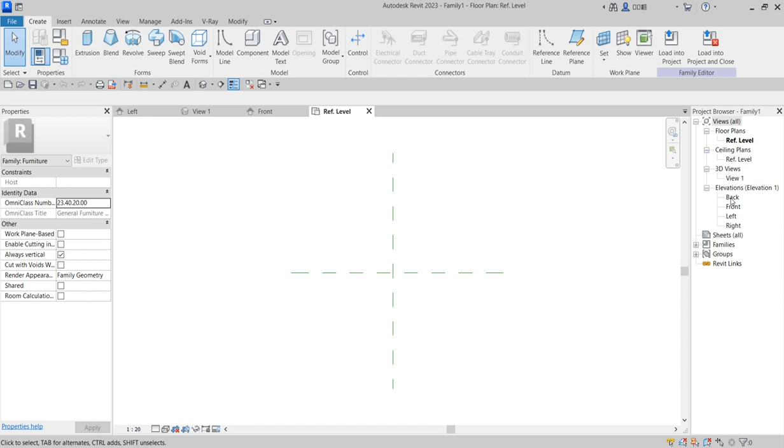So go to elevation, let's go to front or back, choose any one. From these references, what you create is extrusion. Click on extrusion, click on rectangular tools, or first click on vertical so that you have the center to coordinate.

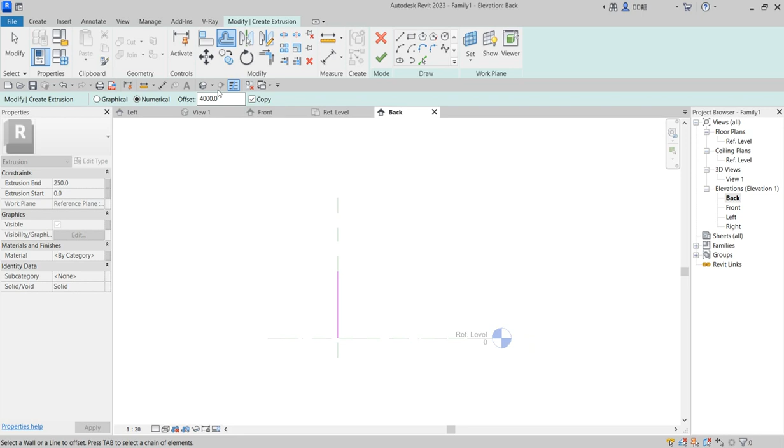So from here now you offset. We want to use 800 millimeter by 800 millimeter. Type 800 on your keyboard, select this, type 800. Do the same thing here as well.

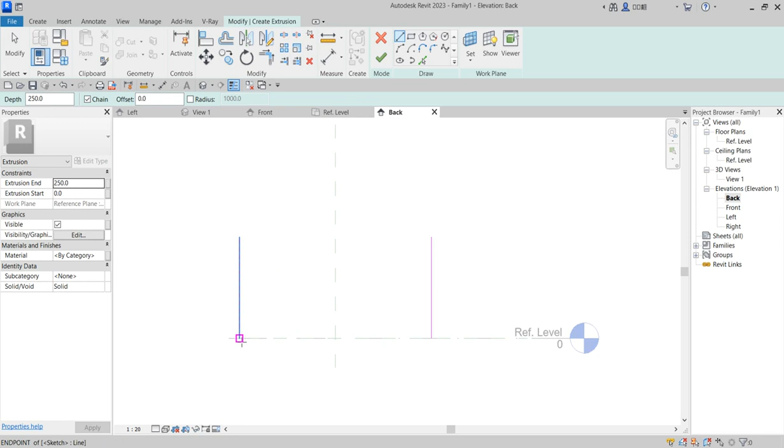Now delete the middle line, delete. So draw the horizontal line.

Offset the horizontal line, make it 400 because we don't want the height to be too high. Now trim.

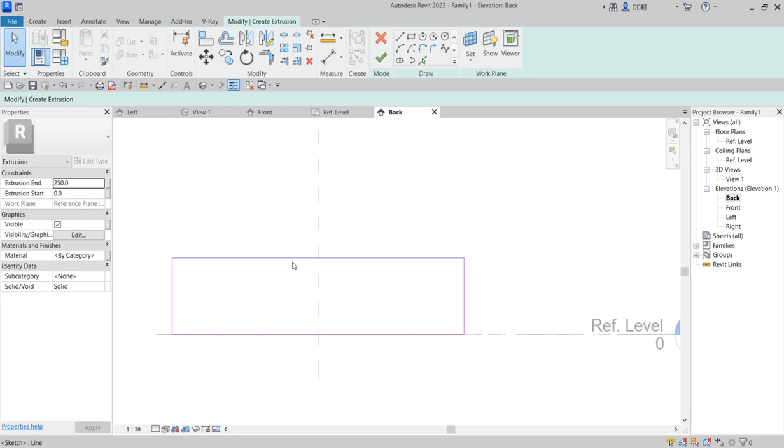Please kindly subscribe. Now choose the rectangle and offset it to -15, because that is the size of MDF board, and MDF board is what they use for furniture. So this is what to do for now.

Say okay, click OK. Now go to 3D view and see what you've done. Click on home. Yeah, that is it. Now this is extrusion, you can expand it more the way you want it to be. You just type the depth here, say 350, enter.

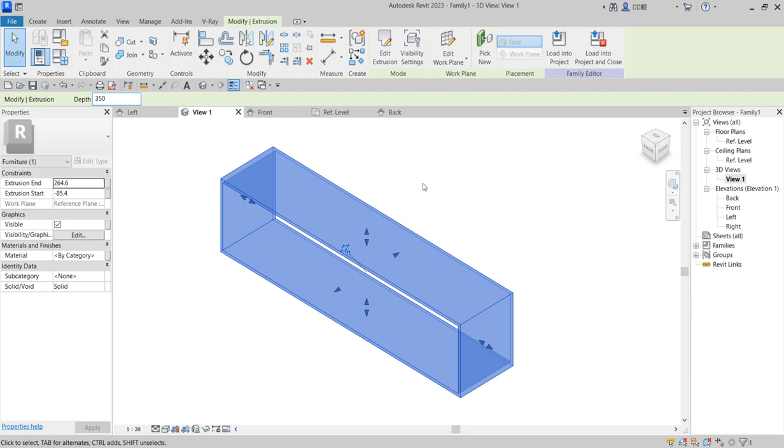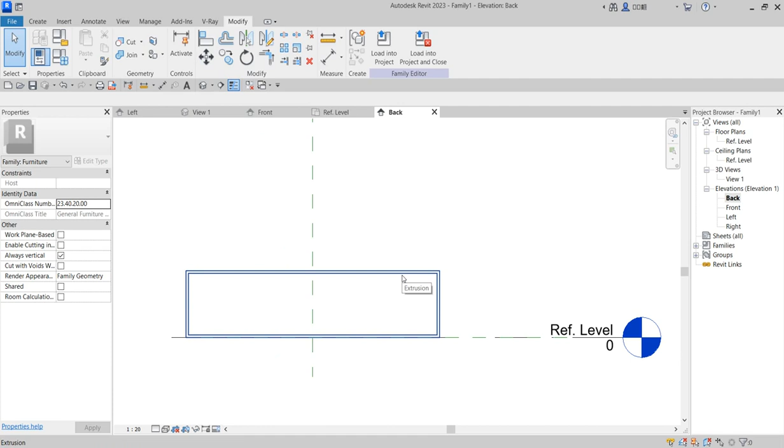So now as we've done this, we want to create the storage inside it. Everything is just about graphics representation. What you need to do in the storage again is create another board, but this time you can decide to copy this one and edit it. Place a copy from here and put it here.

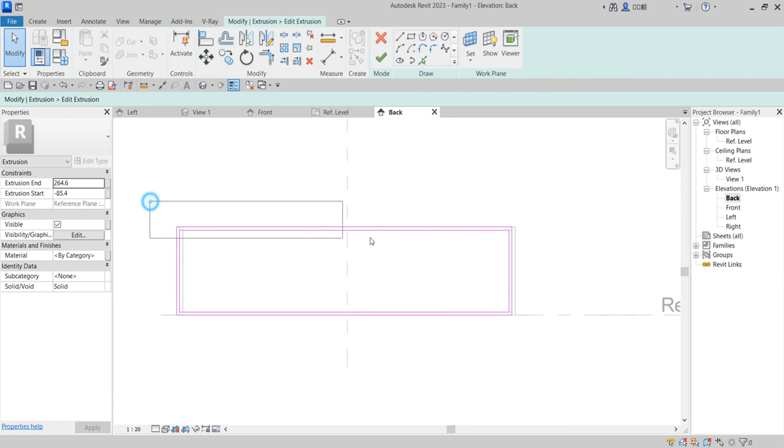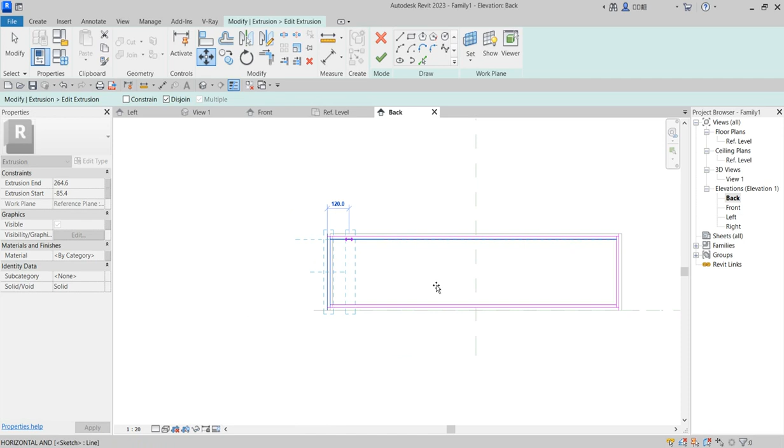Cancel and say edit. In your edit, what you just need to do is bring that here, move. Good, the same thing here, you say move from the outside. Move it to the middle point.

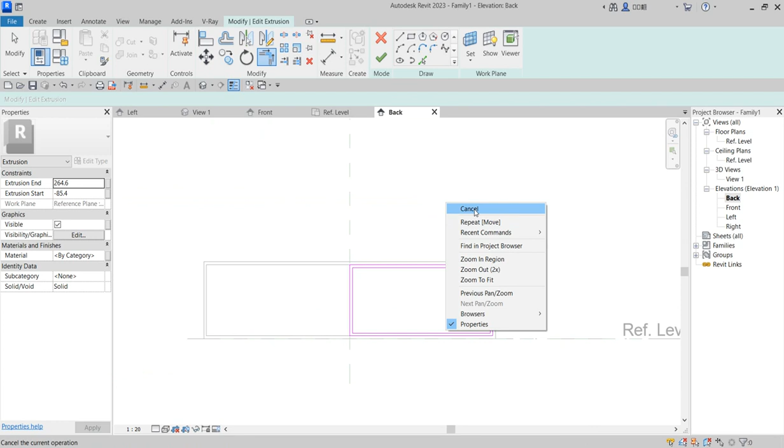Now trim everything. Cancel, trim, trim. So you say finish. Okay, so that's it, you've done that.

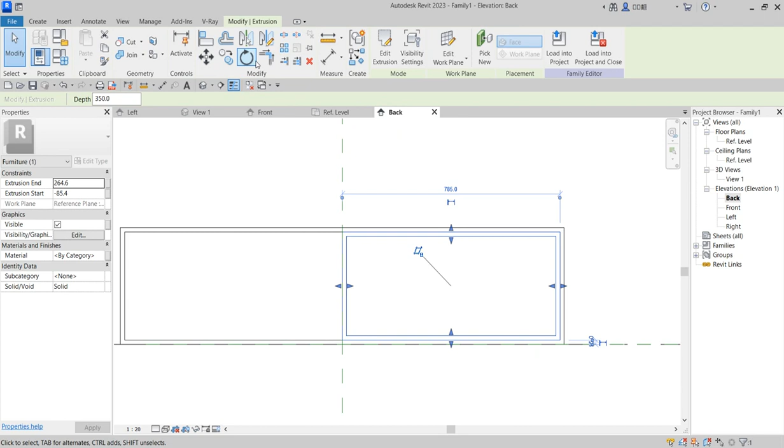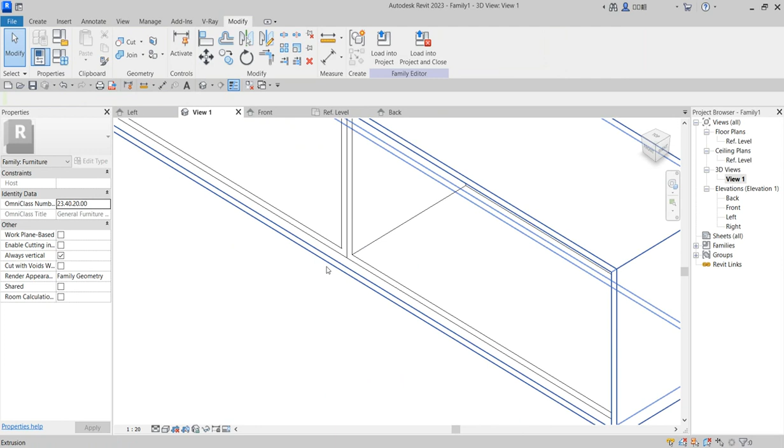So now the next thing to do is click finished. After you have done that, mirror this particular one that you have just created. Go to 3D, then adjust them, move them in a little bit. All right, so after you've done this, go back to the back.

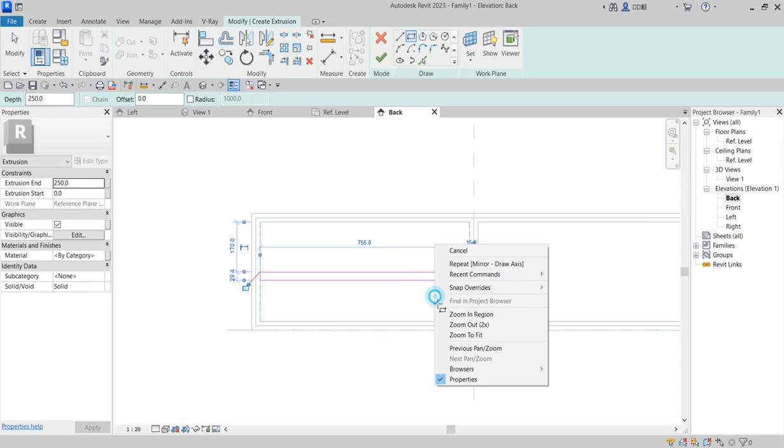So the next thing to do is create another extrusion. We are using extrusion all through here. To create extrusion again from the middle, just draw that box rectangle. Here you select, make it 15 again, press enter. So finish that.

As you've done that, go to 3D. You can't do without 3D, you must always come there and select and adjust. So take it back from there, back, the mirror. Good. So as you've done that, what next to do is create the cover part.

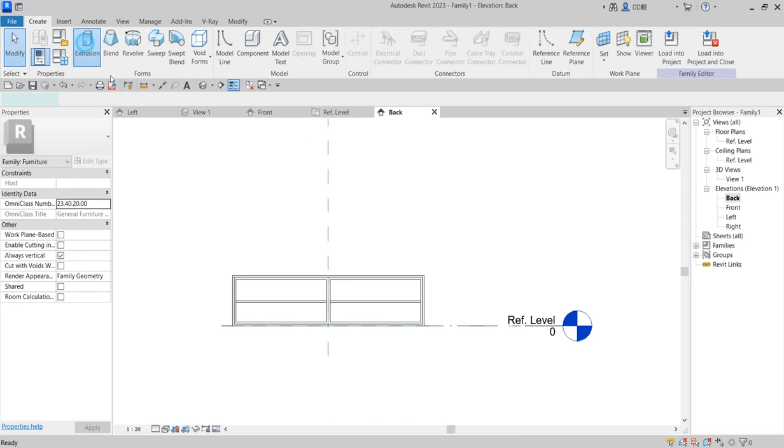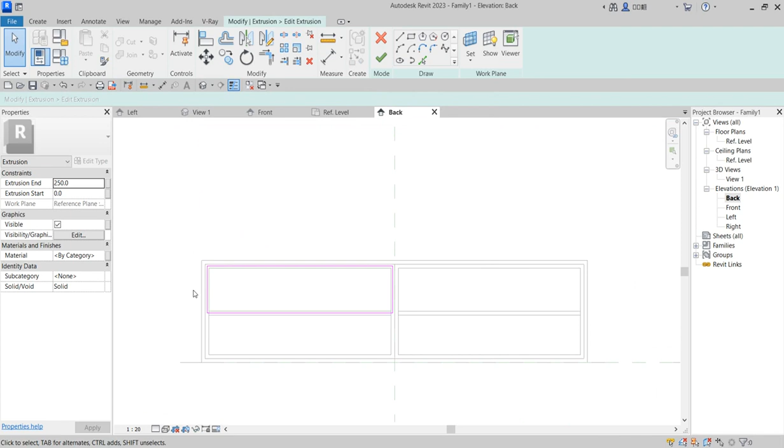Click extrusion again. This time around, you are not going to let it be the same, so just take it somewhere, lift it like 5 millimeter to the edge. Say finished, or say okay, edit, because we want to have the twin aspect of it. We are not opening it, you just want to make a graphic representation. So say from here.

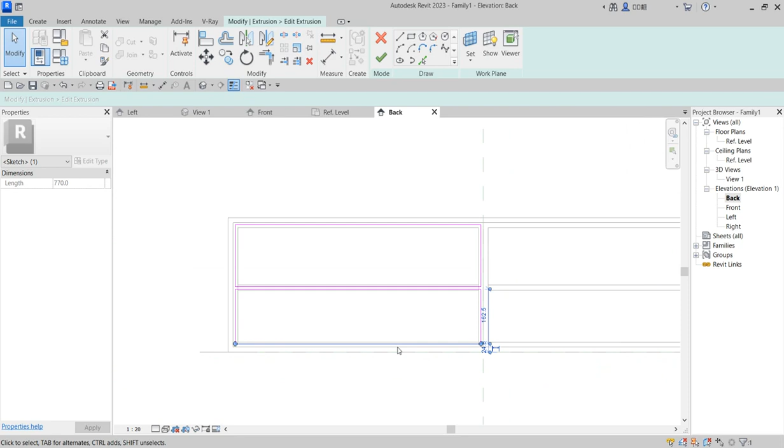Good, so it's more bigger, then you reduce the size here by clicking your arrow, the page up arrow. So finish, then go back to 3D. Here you reduce the height, the depth, and the depth looks more smaller.

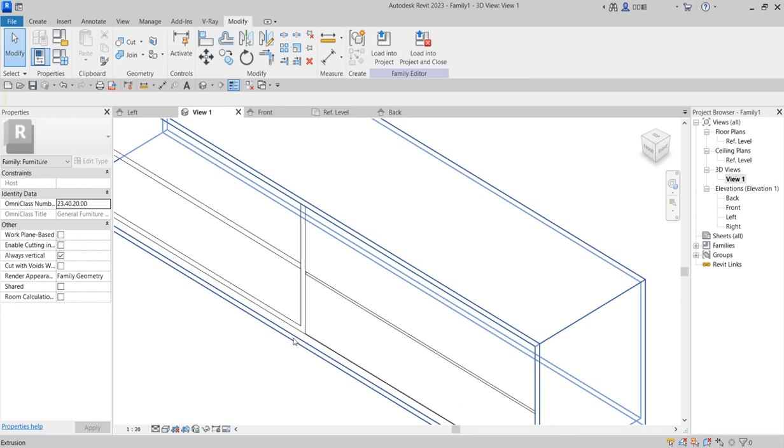So as you see it, good. So you can have as well, take it a little bit in. So you have a depth of, type it here, 15. Okay, so now you can mirror this one as well, but we are not going to mirror that because we have a different thing for that space.

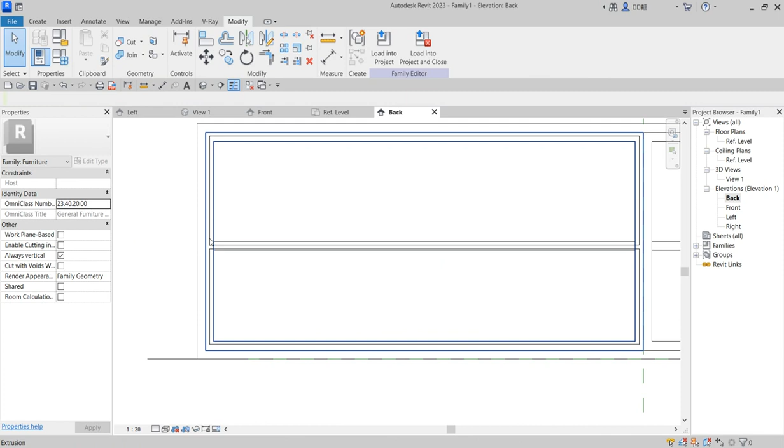So the next thing to do is create the handle for it. Go to line reference. First click so that you know what you want to do. So it was at this place, then you click on.

So now this is how you are going to do your handle. Create from this handle. Now what we want to use is sweep. Use sweep to do this one. Click on sketch.

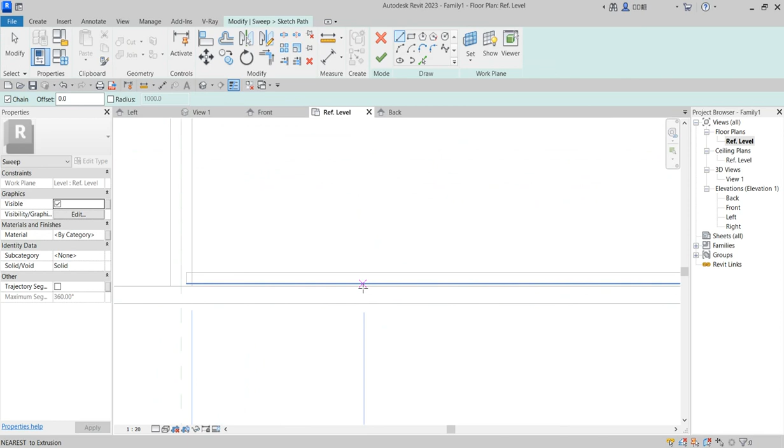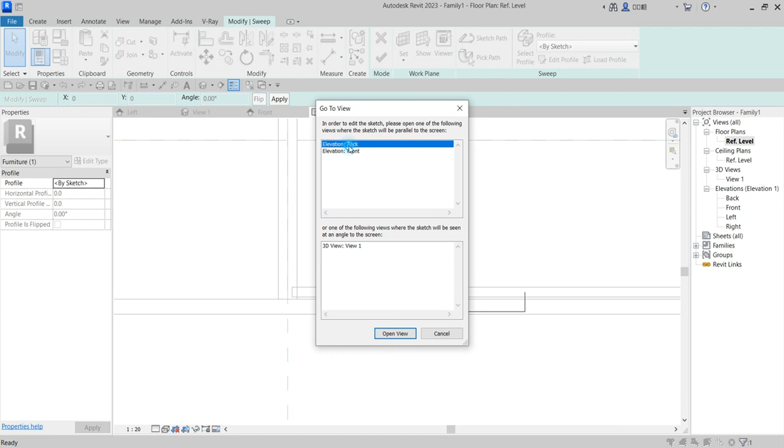Sketch path from the middle. You can click something like 140, it's okay. Here you say finished, edit profile. Go to the back or front, anywhere you know. You go to the front and let it open.

From here you just draw a rectangular box around this. So here the rectangular box could be something like 8, same thing here as well, 8 by 8, 8mm by 8mm. So say finished, finish it up.

So now you carry this, move it to somewhere in the middle, adjust it to, so move the same thing. Now you can decide to say okay, edit the part, sorry, edit the profile.

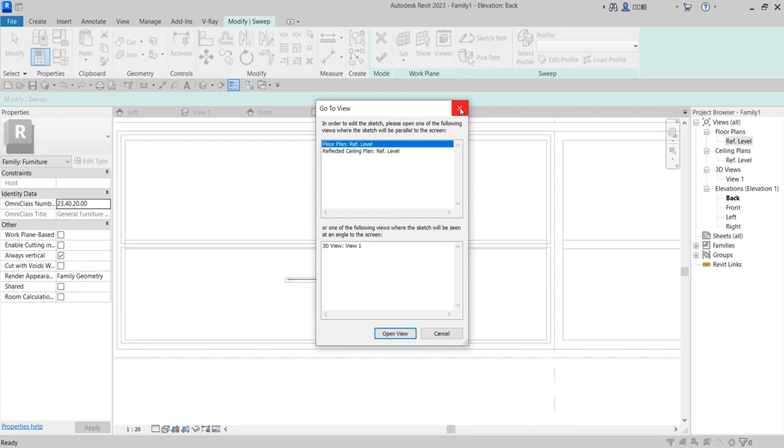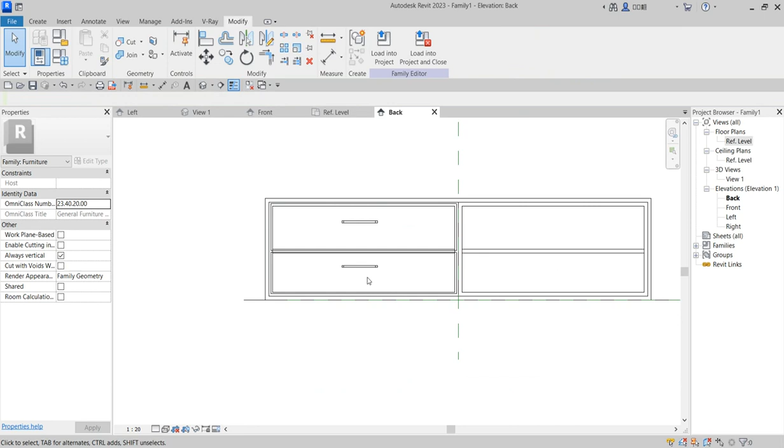Then this particular rectangle, you repeat it up, so copy and bring it up here. Where you put it, adjust it to go up a bit and say okay. You see that you're going to have them, so you have double. So when you look at it from 3D, good. So you have already created that aspect of what you are trying to do.

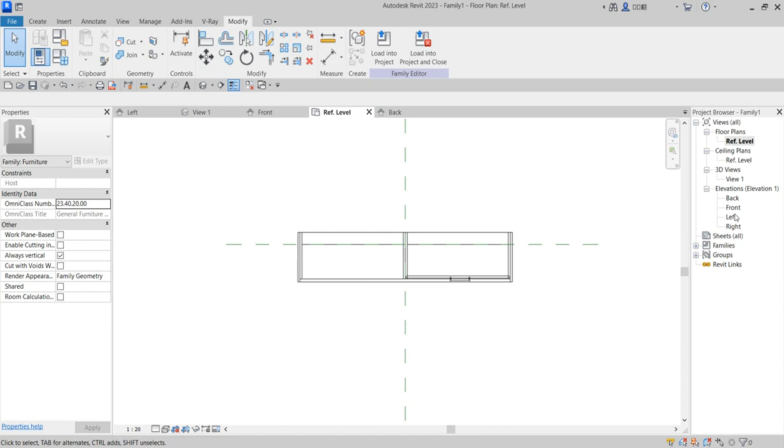Now you have done, as I've done this one, what next to do is create the stand where this TV is going to rest on. So go to right side. Now you create that aspect by creating extrusion again.

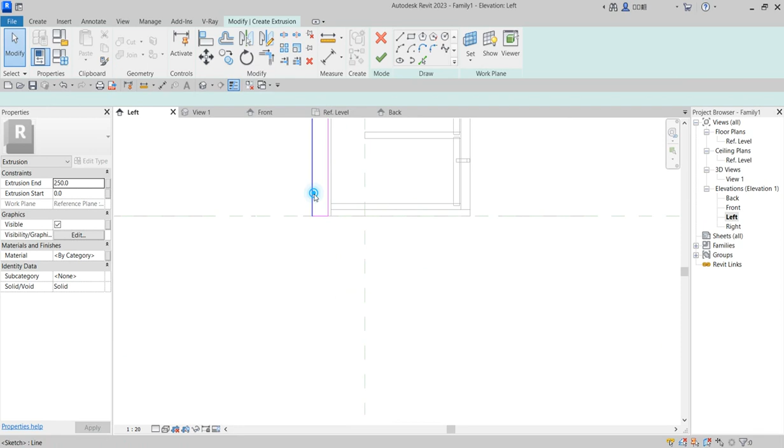This time around you are going to create something different a bit. Give it a space. Let it be a little bit higher than that. The board might be bigger, like 30. Like double board you are going to use in that space, because you are going to pin or use screw to screw TV on it.

This is an aspect of interior design that you need to understand. You just follow us. We are giving everything in detail, one after the other.

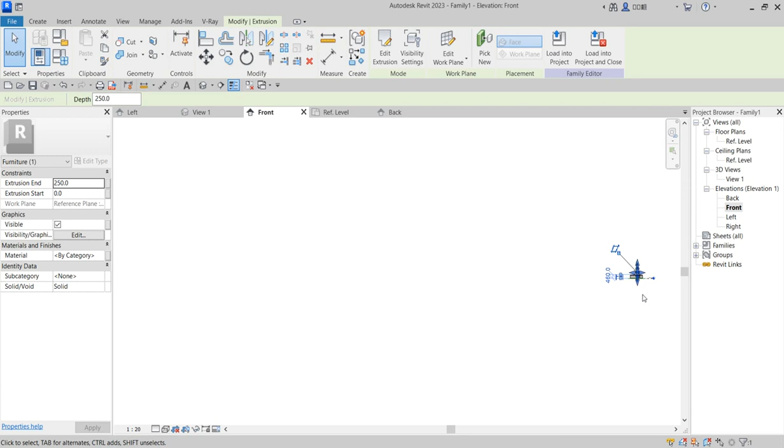So copy here, just give a little space and copy the top, repeat it again. So that is the stand. You click finish and go to your front or back, anywhere you know, then adjust it. I just stretched it to each side.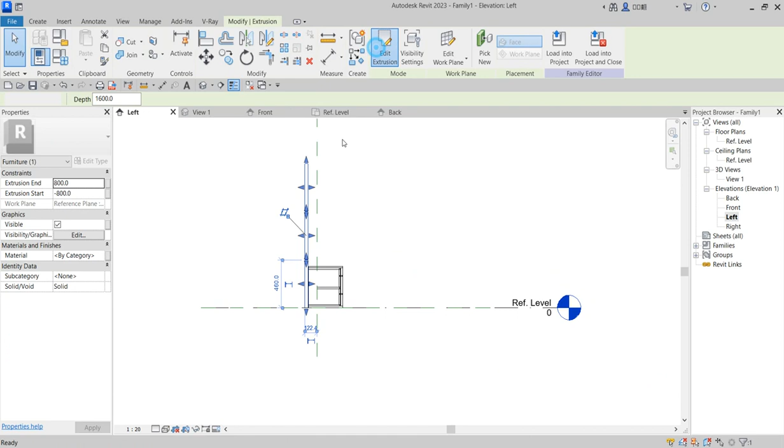That's fine. And if you are not okay with this, you can still click and edit this by taking it up again. But for me now, it's not tall enough, doesn't have enough height, so I would like to add more steps, one more step to it.

Okay, let's say copy from here and drop it here to finish. Go to the front and go and see your 3D. You see what you have created. Now that's after done that, you've done this one.

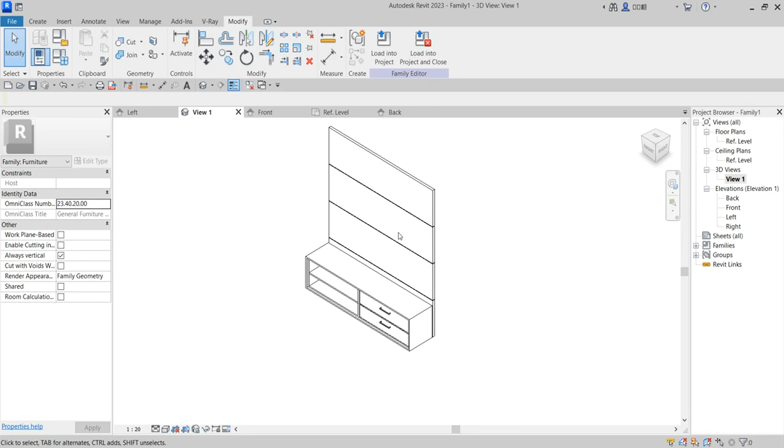So the next thing is to put a TV space in this particular place. So go to your elevation, your back. At this space now, you say create extrusion. Use your rectangular box. So it depends on the size of the TV you are creating.

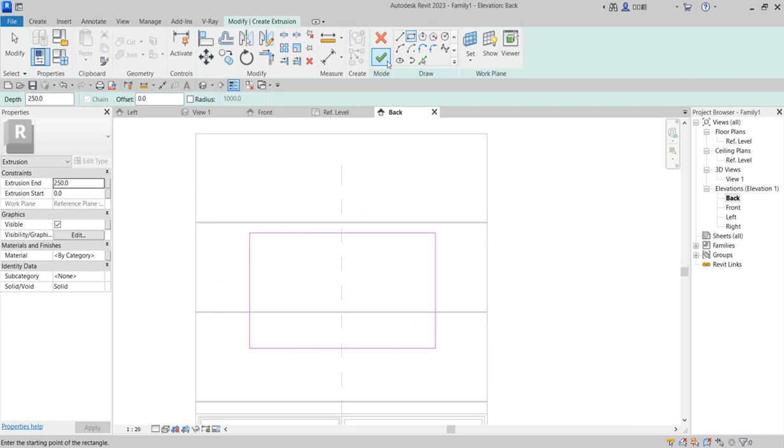So I'm creating something like 1002 by 800. So as I have that one, I click finish. In my 3D, I will adjust it, take it in a bit. Good.

So this one now stands as a TV for you, but it's not yet done. What you just need to do now is to create a frame around it. So click on front. At the front now, click sweep, create sweep, the path, and your path just do fine. So click edit the profile from the right or from the left, anywhere, just say from left. From there now you do the rectangular profile.

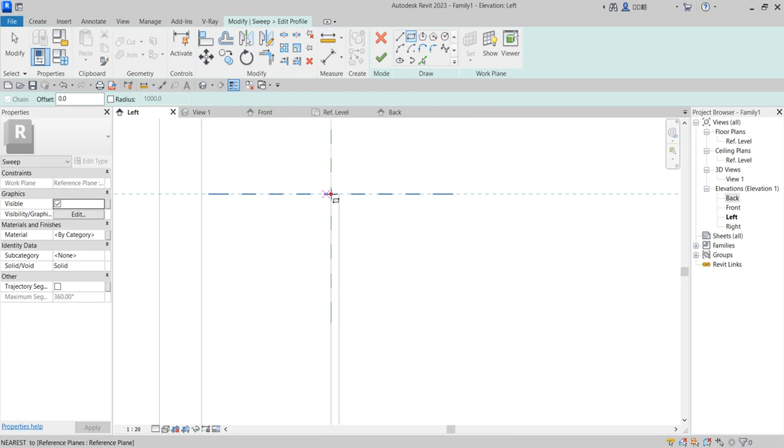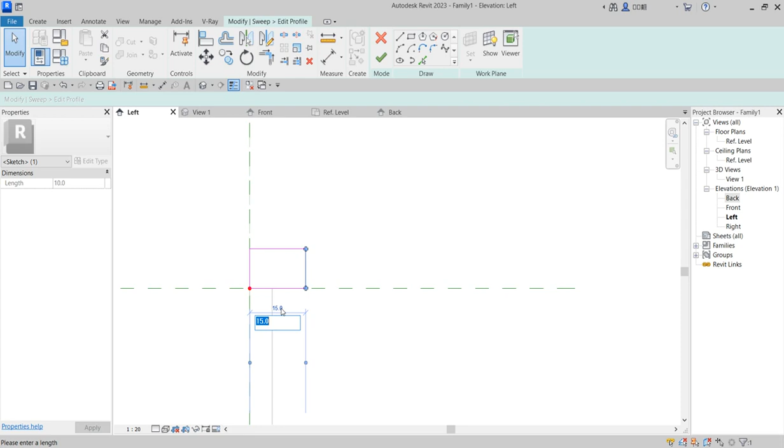Adjust it, type the thickness of the TV like this. All this ultra slim TV that we are seeing nowadays, just like 10 millimeter is appropriate enough. So 10, like 10 millimeter. Okay, shift it a little bit inside, but cover the space small. Click finish and click finish again.

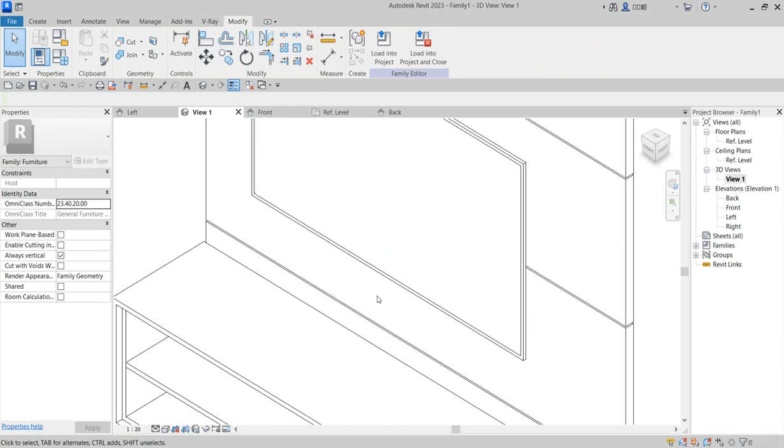So now let us create something like a soundbar. The soundbar, create Revit extrusion. Do extrusion here. Create it here like okay, like 70. I said 800 and something.

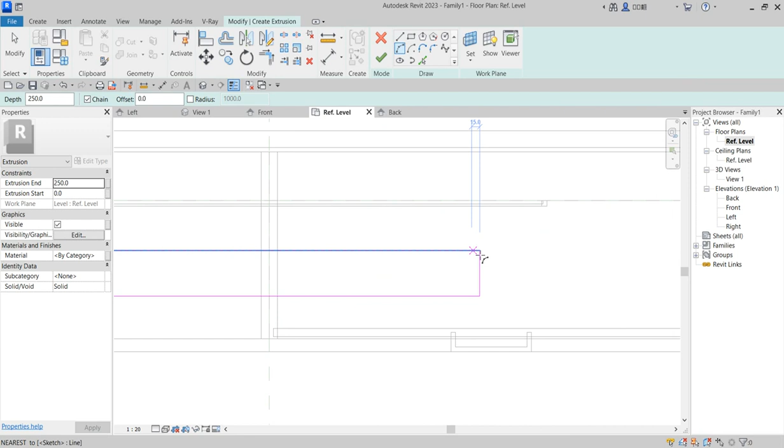So from here you say, because you don't want it to just be just like this. Escape. Okay, so inside there, we remove this line. Remove this line. So click finished.

On your elevation, drag it up and let it rest on this. So when you go to 3D view, you see your soundbar here.

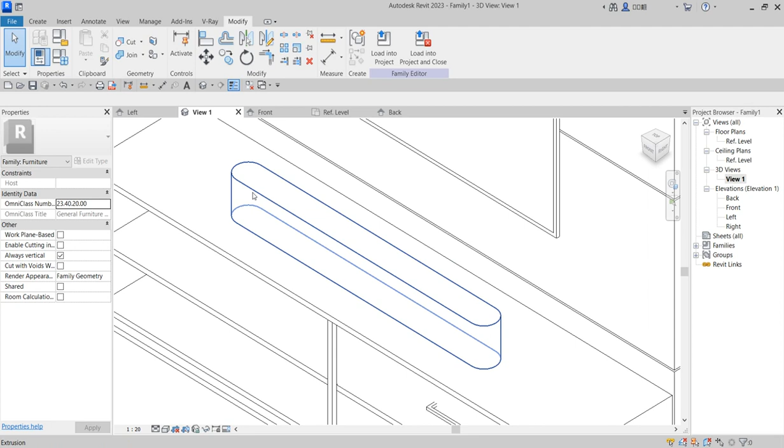So you need to adjust this one to something that will give you some great look and a refresh mind on certain things. So now what to do on your soundbar depends on your depth or the height of which you are using. You just want to use something like 100 mm. Good, so this is the soundbar here representing.

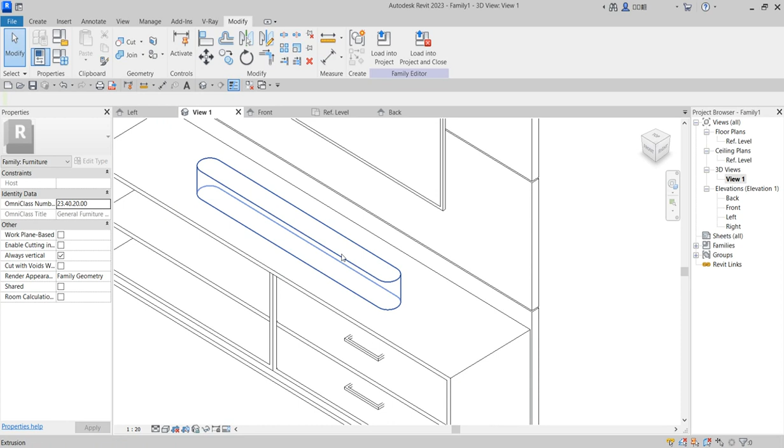You can adjust it and bring some kind of beauty towards it. So let me just adjust something here by saying copy this and go to the side, say copy, remove it, control, take it up. So from here now,

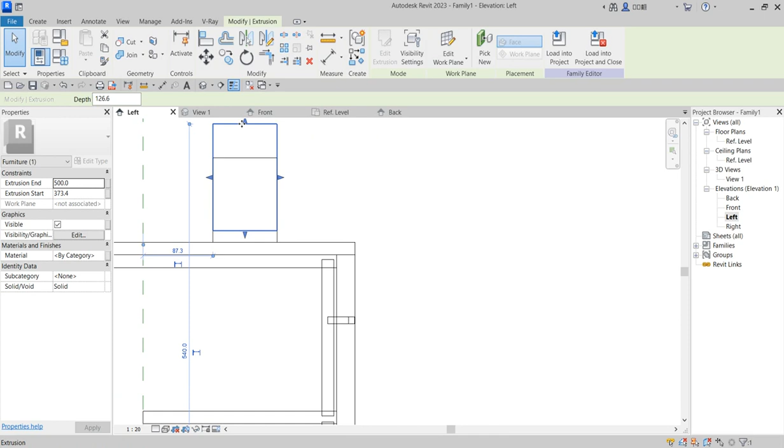So edit this in your vertical reference, click edit, offset it inside like 10. Do not click copy, you just want to offset everything in there. Good. So click finish, go to the left like that.

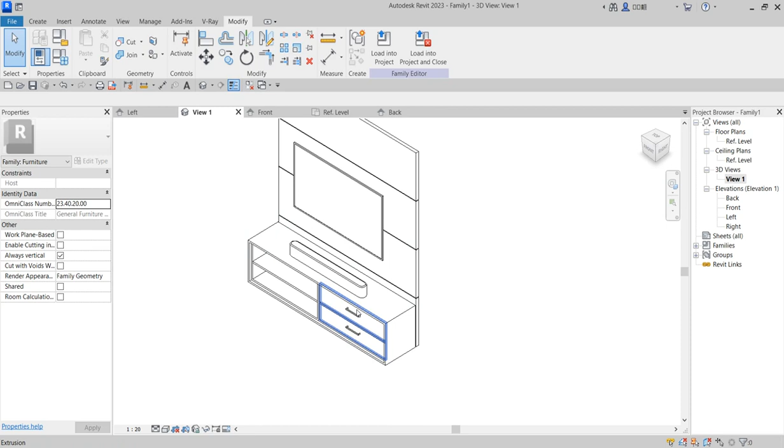So now let us change, adjust material for every one of them. So the first to do is to click here on this one, say okay, edit category. I'm using something, always use render appearance. So click duplicate.

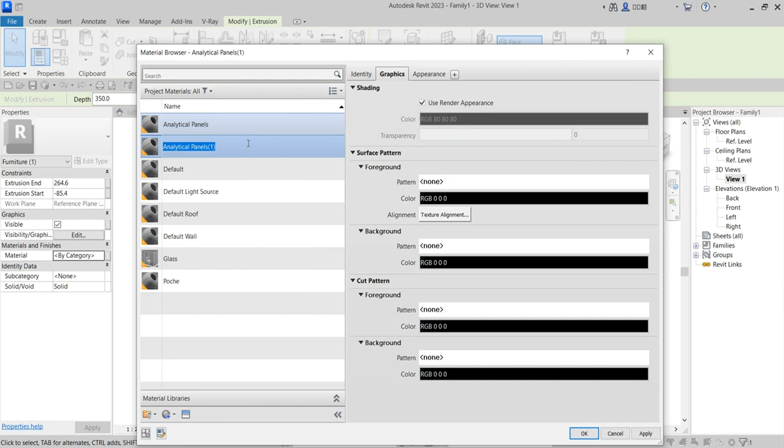It doesn't matter, you may not name them, it does not really matter. This one, then go to appearance library, click on what would you use. So click on wood

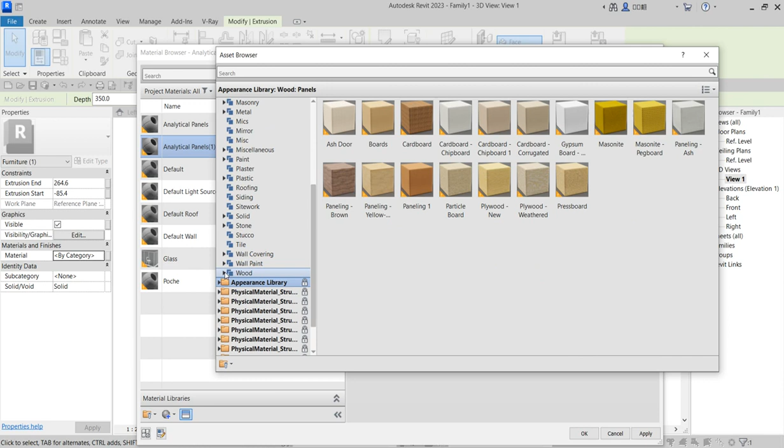Panel. I don't like this wood, I need something black. I'm going to get what I want, the kind of wood. So go to wood, click okay, softwood, add wood.

This wood did not have enough material to use. Okay, let's just use the wood that's available. So let me use mahogany.

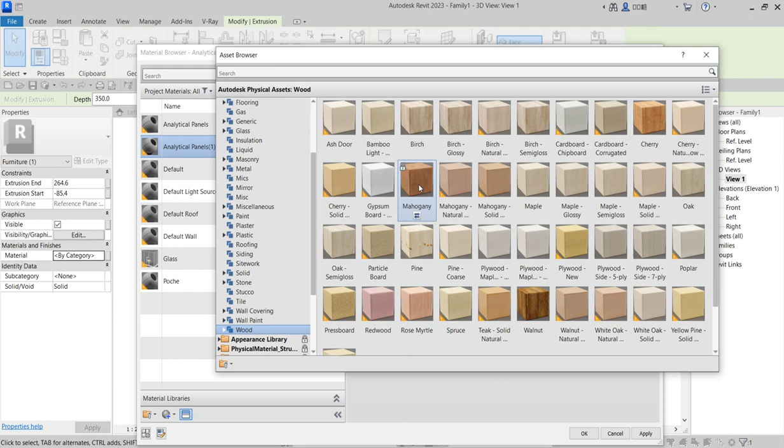Okay, here's the image. Good, so apply that to it. You can use your realistic or shaded so that you'll be able to monitor how it's going. This particular one, change it to something black.

Duplicate the material, adjust this, click on this black, click on it. Same thing here, adjust this particular one, duplicate it as well, because I don't want the kind of black that will be too dark, so I just want a little bit different among them.

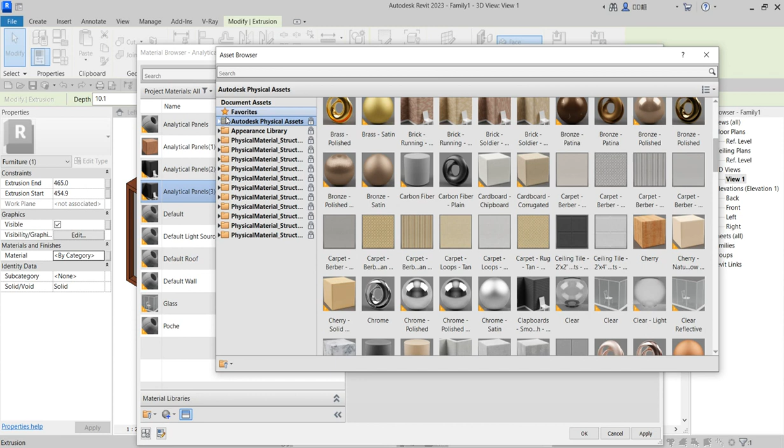Okay, we're sealing black, that's the appearance. Go to plastic, okay, fine texture. Use this fine texture, it's okay. You see the blacks are different, so it gives you the relief of seeing what you are doing.

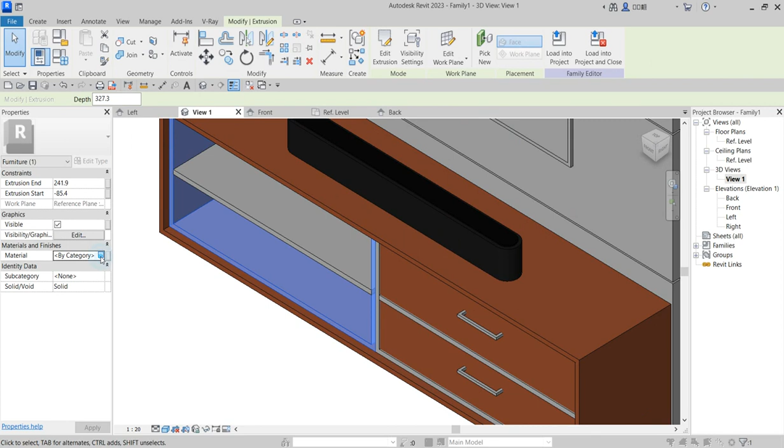Like this one, use the same thing with mahogany, click on it, say okay. This inside one, I want to change the color to something babyish, something that looks very different, a kind of color that can bring contrast. So like this bamboo, use this.

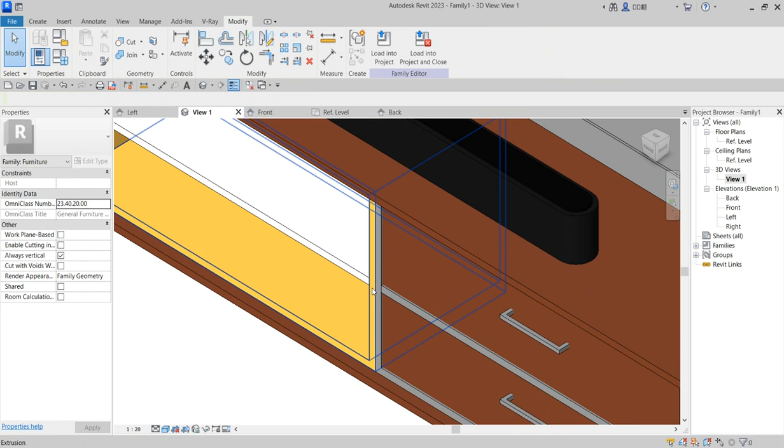Okay, apply. Now change this one to another color, duplicate it. Say fine on it, just use white, square white. Good, so do the same thing here as well. Use this one to do it, adjust them to suit.

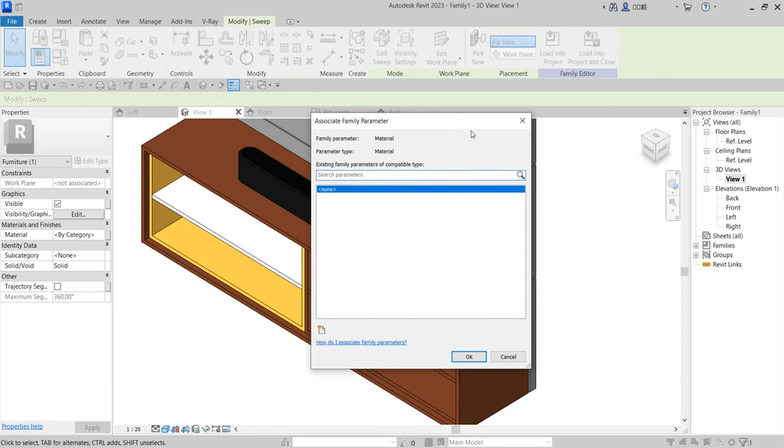Click like that. So there I'm going to use the same mahogany for them. Fine, so I'm changing this one to metal. Edit, duplicate it. So let's use aluminium polish. Say okay, fine. So for this background, I'm choosing this pure white background.

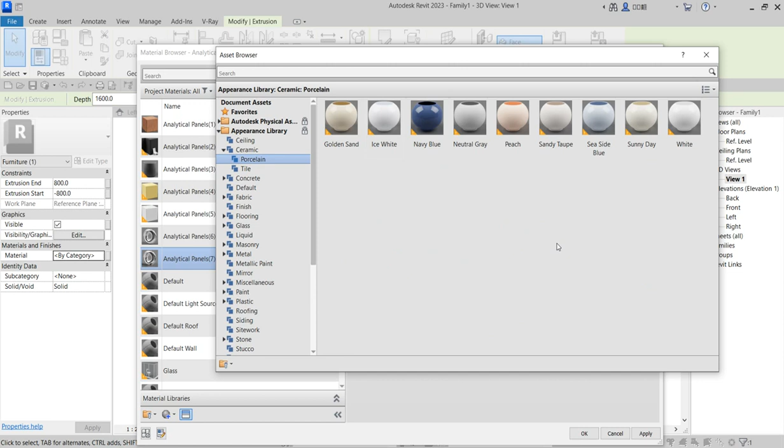Duplicate, edit. Something like okay, library appearance, ceramic. Okay, so I'm using pure white. Or Sandy Taupe. Let me use Sandy Taupe, not too white, because we are using them in interior.

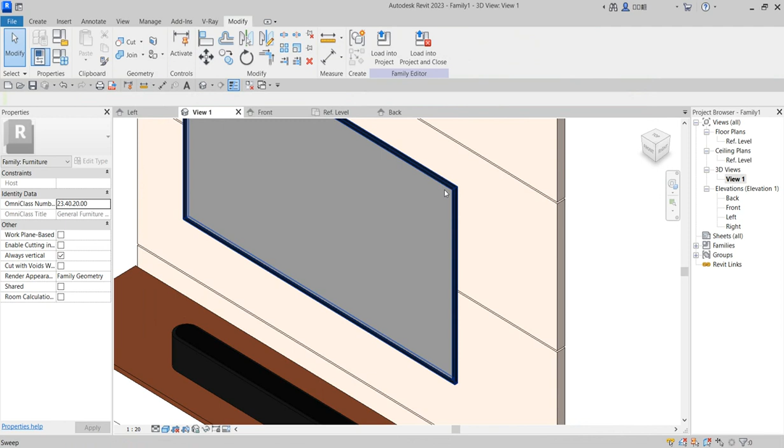So this one, use the color of any of this. So click. I'm using yes, outside. This particular guy inside is going to take the form of that one inside. So I'm using this particular black. So that is how you create your something.

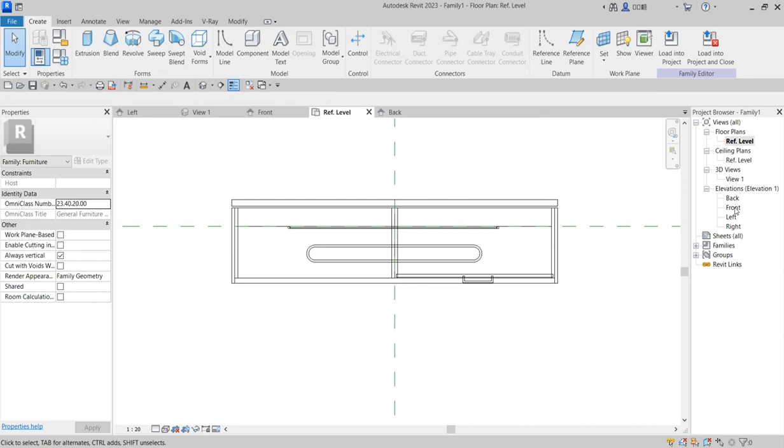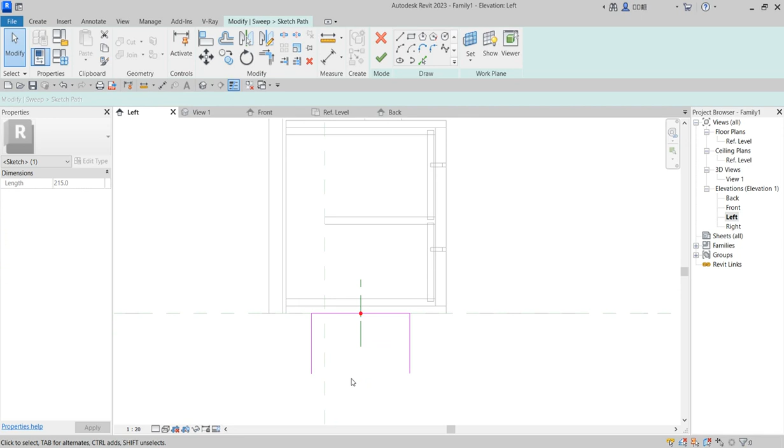Now let me create a stand for this. Go to this particular place, click create sweep. No, go to the left side, create sweep, then use this, what you do here, good. Delete this particular one, so finish.

Click on edit. Yes, right, do circle, something like this. So to finish. Good, now the next thing to do,

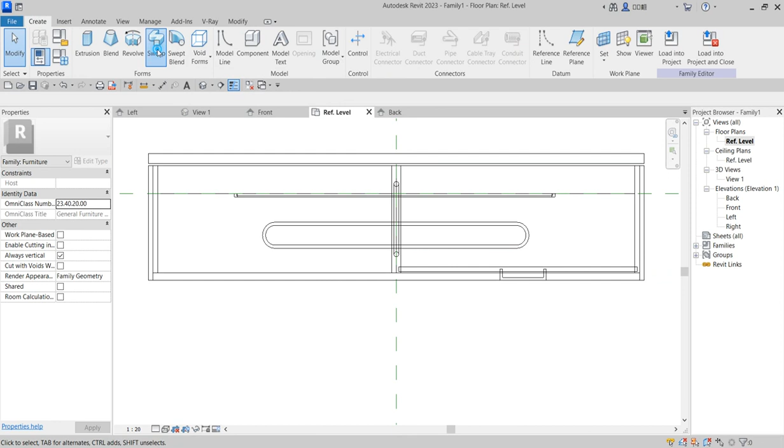go to reference, and this reference now we want to do create sweep again, create sweep parts, click vertical, align it. Should be aligned. Okay, now click finish, go to elevation.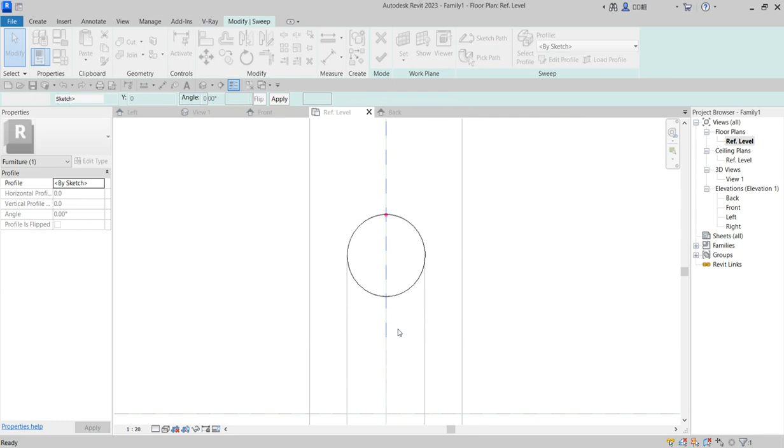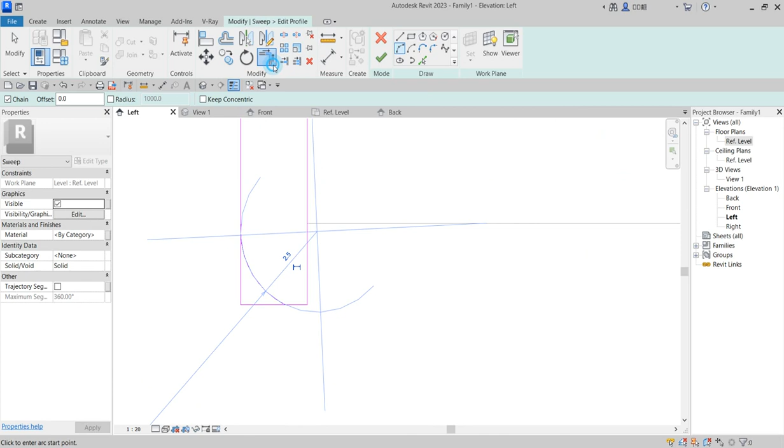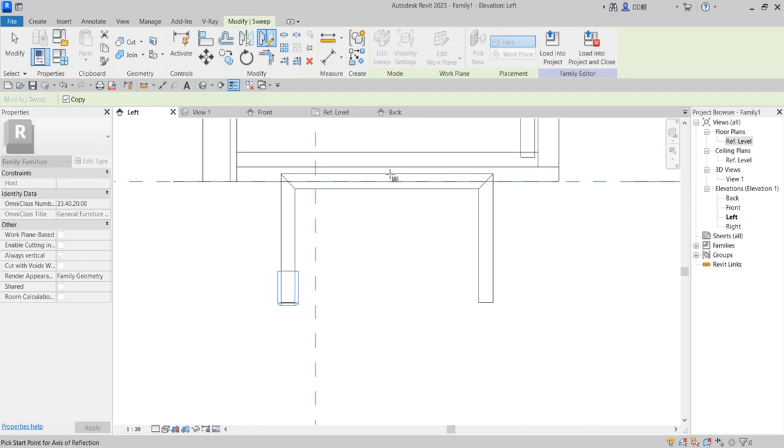It's too short. Okay, if it's too short, adjust it. Okay, so finish it, so mirror it. Good, you have that, adjust it so that it's at the middle center.

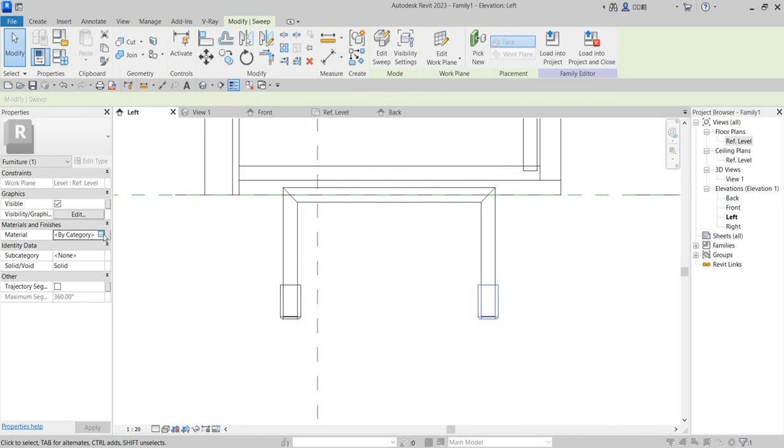So you change the material for this. Let it be metal. This one, change it to something black. Good, so go to front, back, anyway.

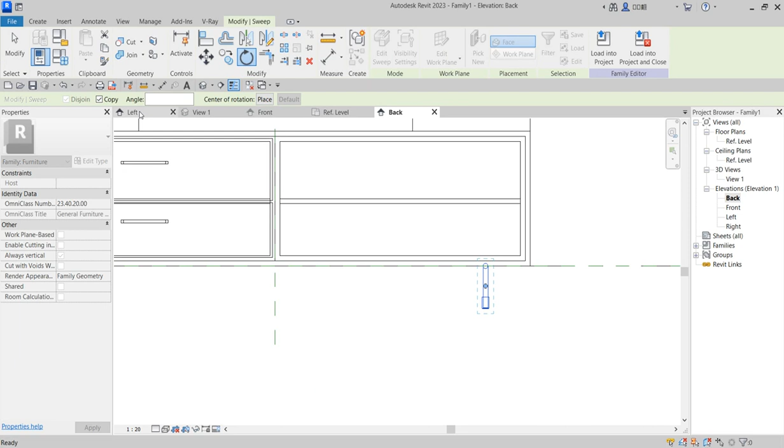Click this, move it to the edge, something close to the edge. Now rotate it, click on copy. Move to the center here. From here now, somewhere here. So adjust this one, say mirror with copy.

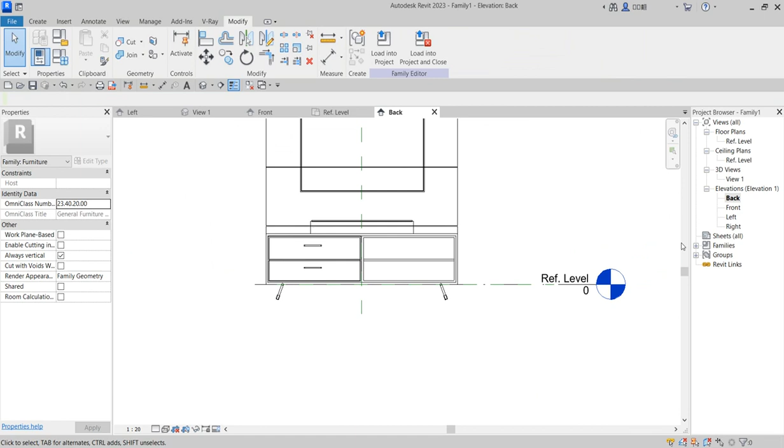Good, now shift this up because when you want to load it to a project, remove constraint. Adjust it a bit.

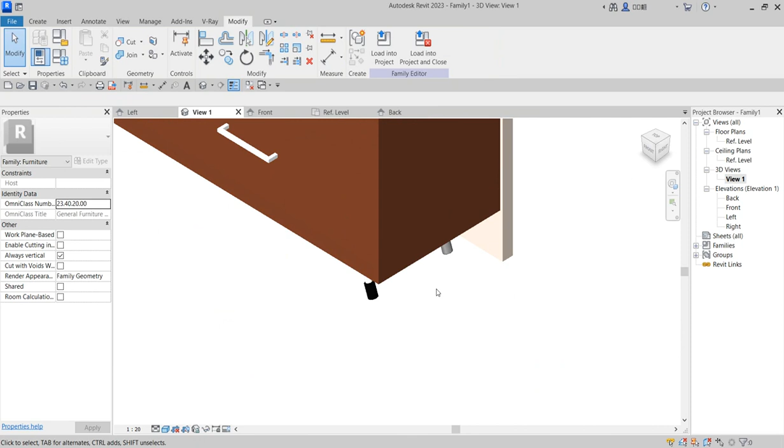Good, so go to 3D. You see what you've done, see the leg, see everything. So now you can open a project.

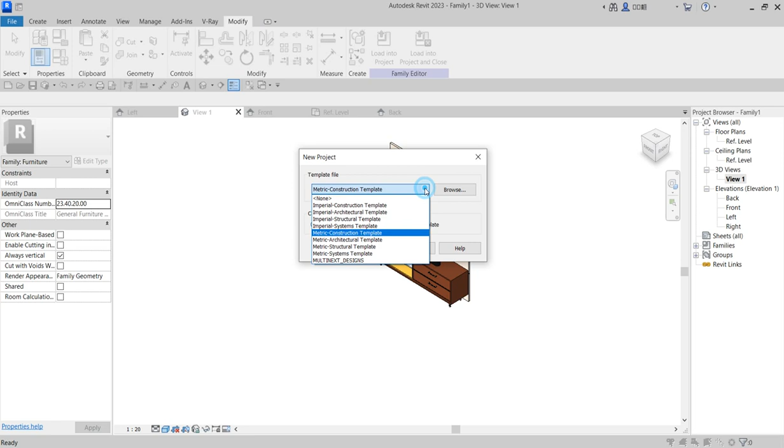Let's just open one project, or let's open a new one. Click, say new, use architecture templates. Yes, metric architecture, okay, that's a new project. So here just click wall, don't draw any wall around, make it 3000.

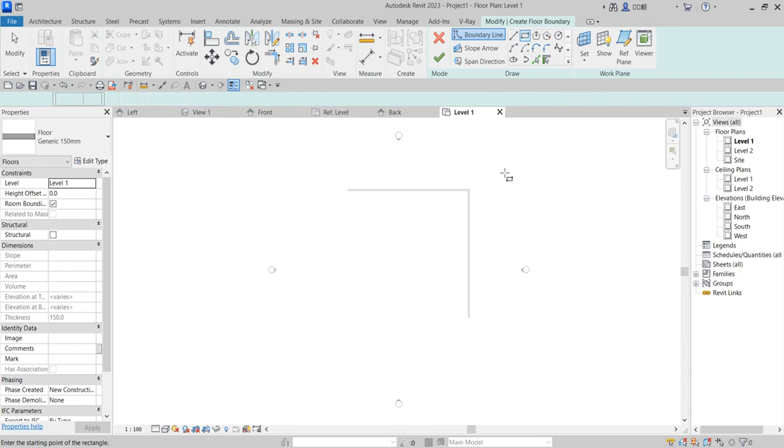So this is how to create a template of your own to suit you. So you say finished. As you've done that now, you go to your elevation, your something, then you click on load into project. So you have it here.

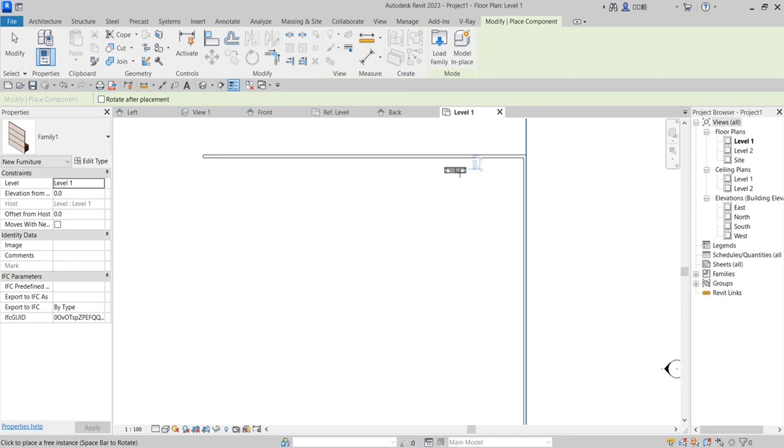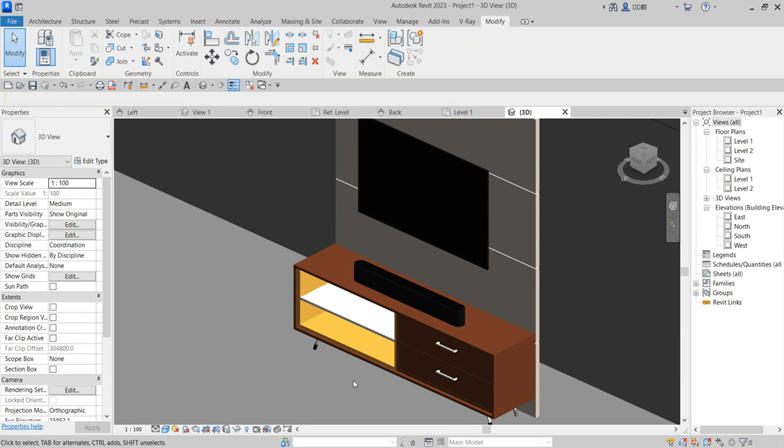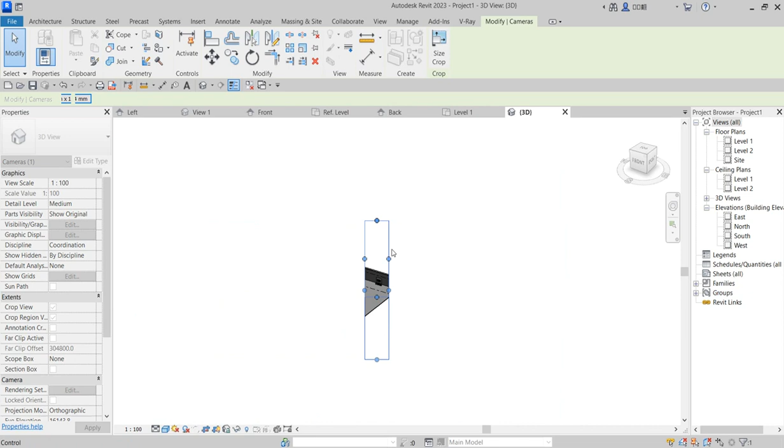So now you can crop a space if it's too big or too large for you. Crop it so you are focused on what you do, so it can fit.

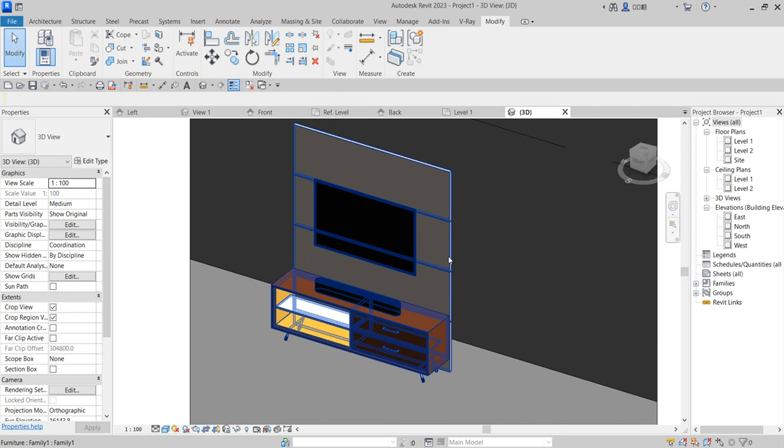That is how you create your, what is it called, your TV stand. You can render this if you wish to render it, every color is going to come out. That's the detail on TV stand for you.